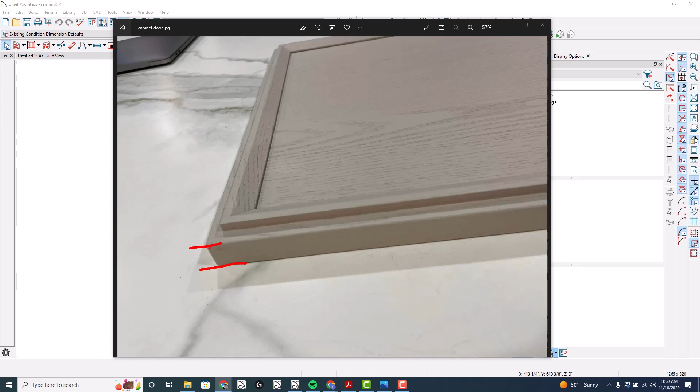We've got 3 sections here really. This frame is 3/4 of an inch. This molding is 1/4 of an inch, and this panel here, I'm going to guess, is 1/4 inch thick, and it's inset into the red frame. I'm going to guess that this molding is 3/4 of an inch, and we're going to create this door ready to be a cabinet door.

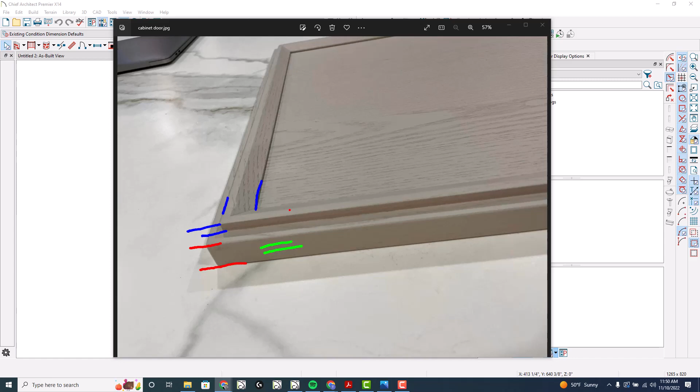So let's get started. Might take us a while, but let's do this today.

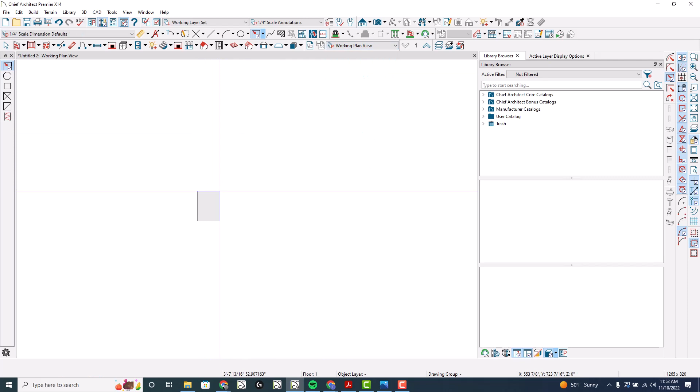To start off with, I'm going to just draw a wall—no, actually I'm going to just do this on the flat. We're going to go to this, and I'm going to draw a door, and let's make this 24 inches wide and 30 inches tall. And this will be the main panel.

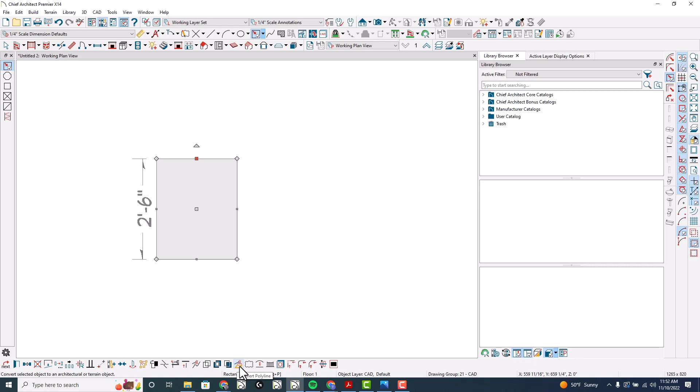Not panel, the main frame. I'm going to do a molding polyline, and we're going to select a square or rectangular polyline. I have one that I call 1x8 trim, but since I'm in version Chief Architect Premier X14,

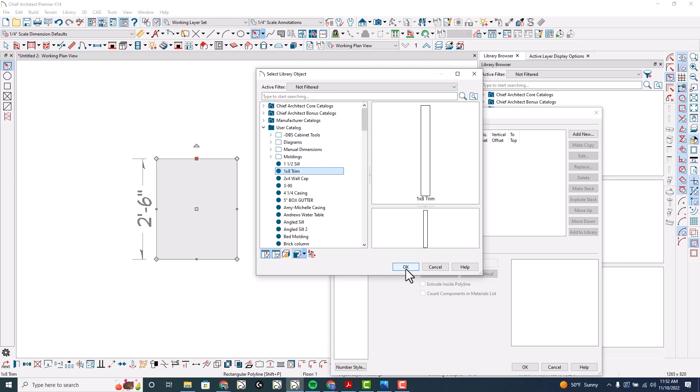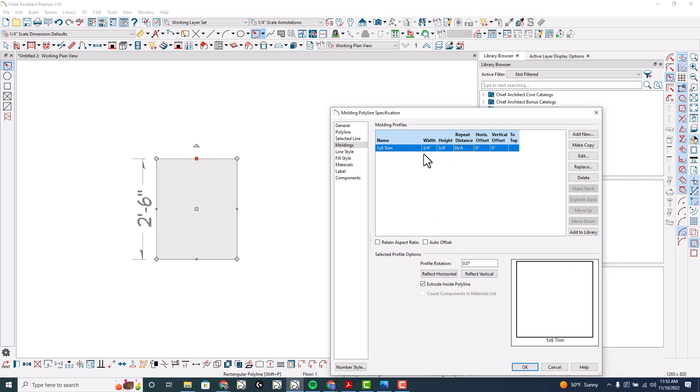and this has actually happened a couple of versions back, I believe 12 had it, I don't remember exactly—I can make this, even though it comes as a rectangle, into a square, 3/4 by 3/4, and I'm going to extrude inside that polyline. So there's my frame.

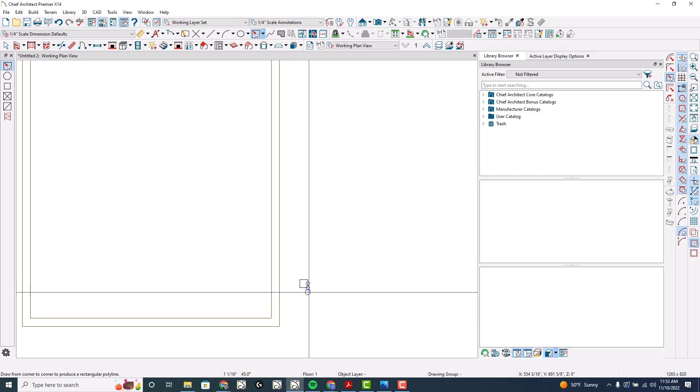I'm going to draw that profile of the molding, and I'm going to say 3/4 by 3/4, and we're going to break this square and just bevel it like so—and maybe it's not quite so much beveled.

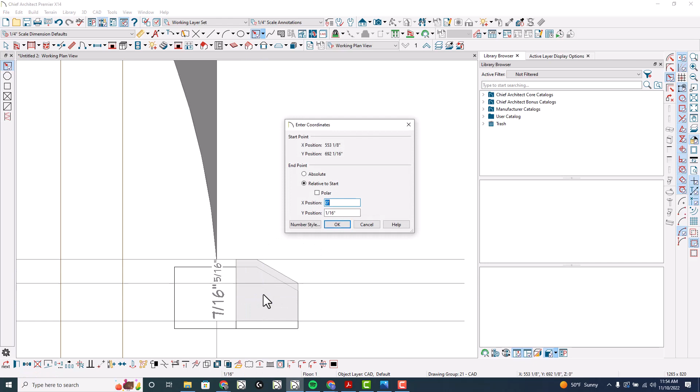So let's do a section. This is my 3/4 frame. I'm going to guess that this is 1/4 inch up, and my panel is 1/4 inch tall, so that's centered here.

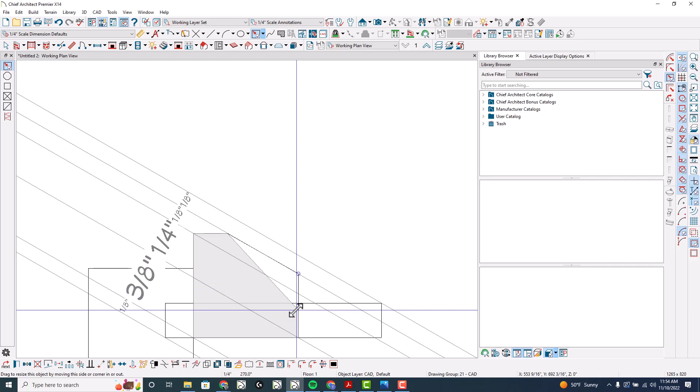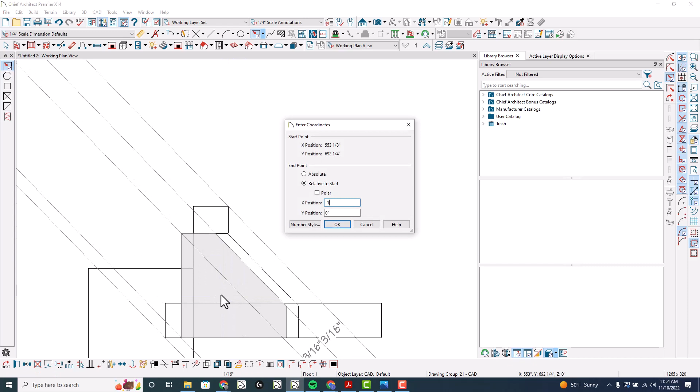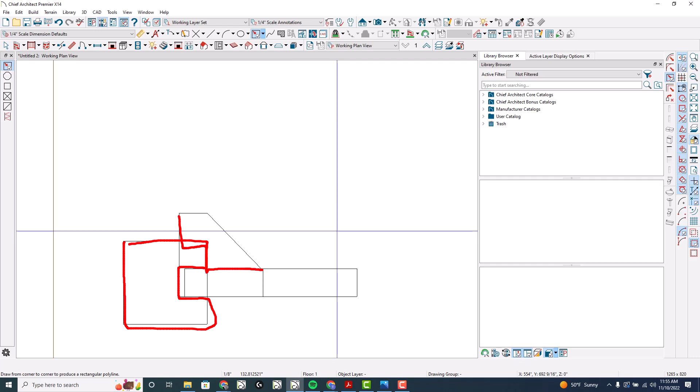This I want at 1/4, but this molding is actually going to go over -1/4, like so. So now I know this is my cut section. If I were to cut that door, I've got my frame that does this, I've got my molding that's going to actually—and then this is my panel, so this is going to come like so.

So the quick and dirty way is I could just make my molding do like that, but then if I take a section of the cabinet door, it wouldn't look quite right. So we can really make that molding wrap around the frame and the panel like that.

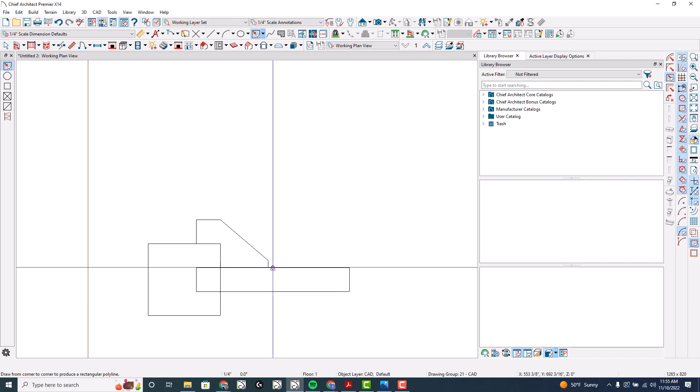Okay, so now I've got my molding in place, and I'm going to add this to my library.

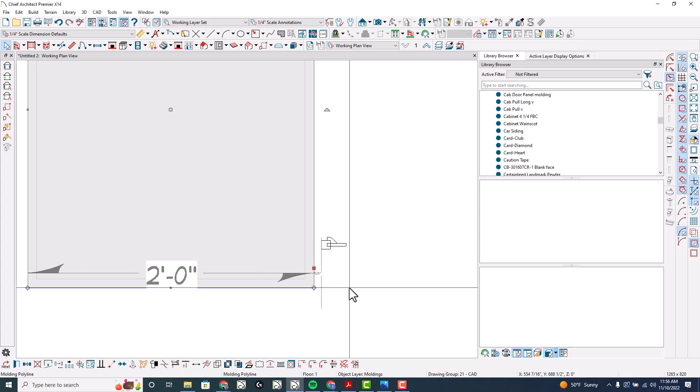Alright, so in this molding polyline, I can open this up. I could do it that I made a separate molding polyline—why don't we do that? Because then it just works. I'm going to do concentric.

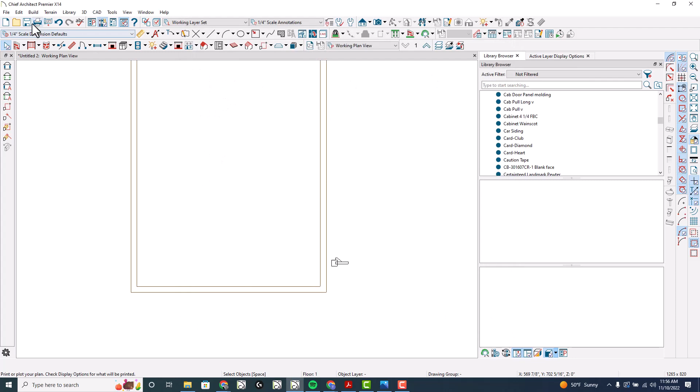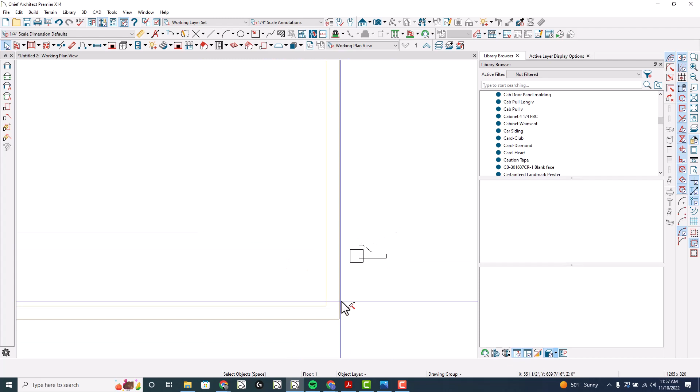So I've got my toolbar right here. You can go to Edit Preferences—I think if you're on a Mac, it's File Preferences—and go to Edit Behaviors here. We want to choose concentric, and I want to jump 1/2 inch, because remember, this is 1/2 inch inside here. So I'm going to take this and copy, and while I'm in concentric mode, I'm just going to drag that corner over, and all the way around, that's 1/2 inch.

I'm going to go back to my preferences and change the jump at 0, and go to default type.

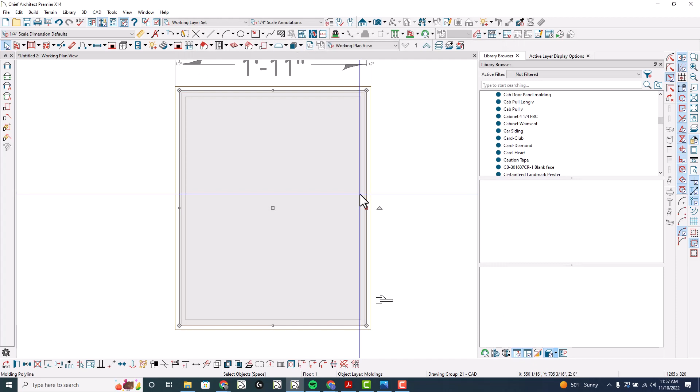Alright, so this I want to be 1/4 inch up, and I want to change that molding. We're going to replace that molding with the new molding we just created.

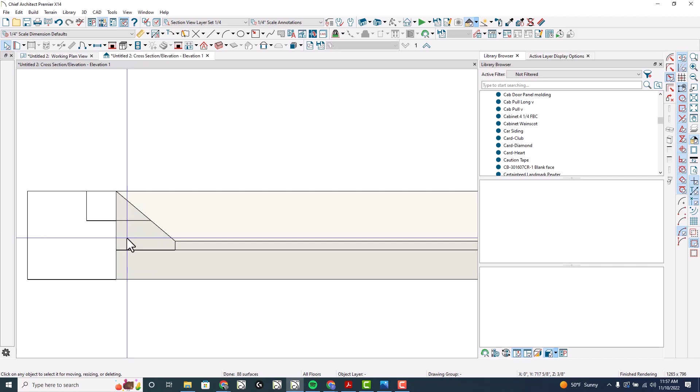Now let's take a section of this and make sure I've got this correct. I need to be more than 1/4 apparently, so let's do that. I'm going to double click. So I've got my frame here, and the molding is this one here. I'm just going to double click on that molding, and it's actually 1/2 inch up, and there we go.

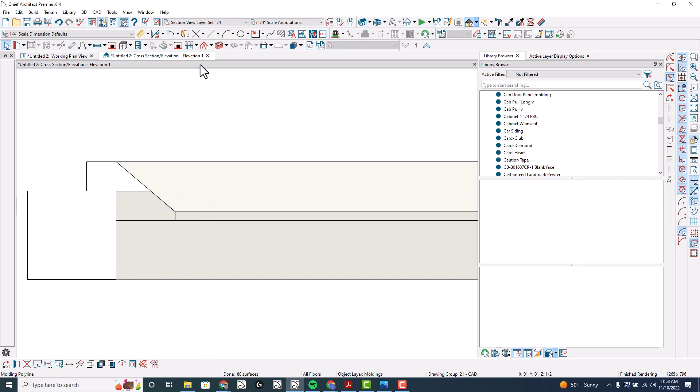When I say that, I always think of My Big Fat Greek Wedding. And so there you go. We're all Greek, and so there you go.

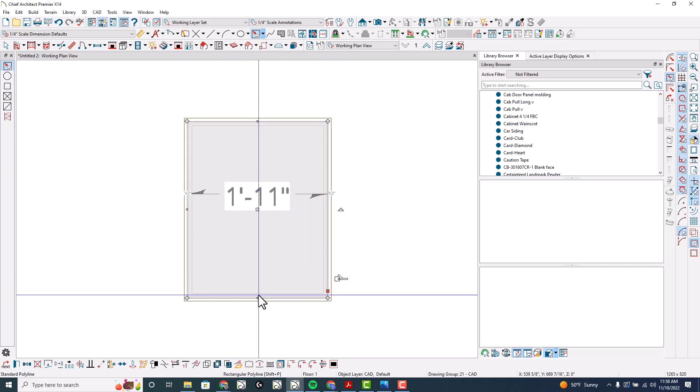Alright, I'm going to draw a panel. So I'm going to draw a polyline, the shape of that internal molding that we just created, the profile molding, and I'm going to convert this to a slab.

And that's only going to be 1/4 inch thick. Absolute elevation at the top is 1/2, I believe.

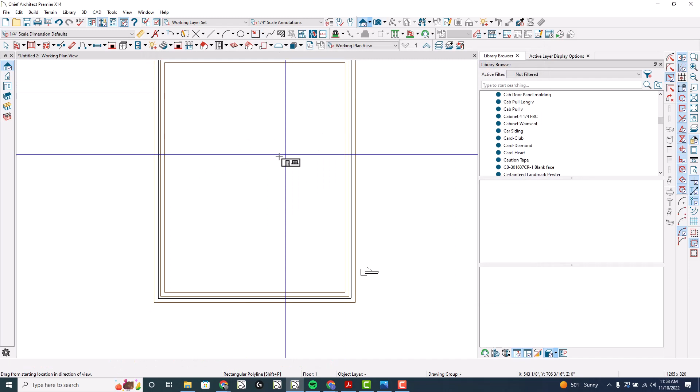Let's take our section and make sure I've got everything correct. Notice this section is exactly the same section that I drew right here.

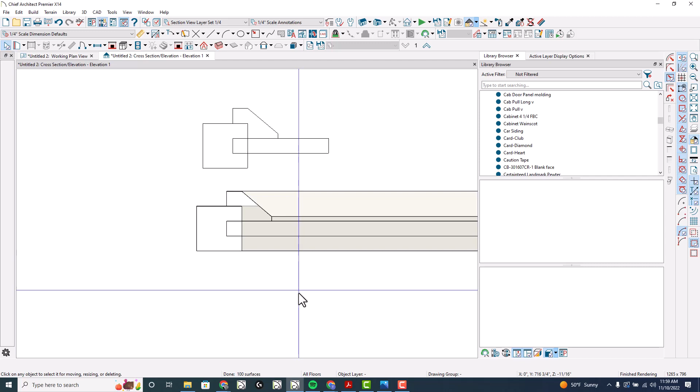We'll copy this profile, the CAD objects. There you go, that's the exact section I want. Okay? Excellent, we can close that. We don't have to save it.

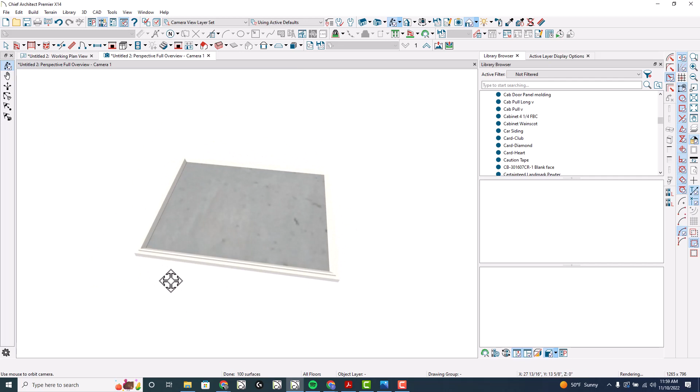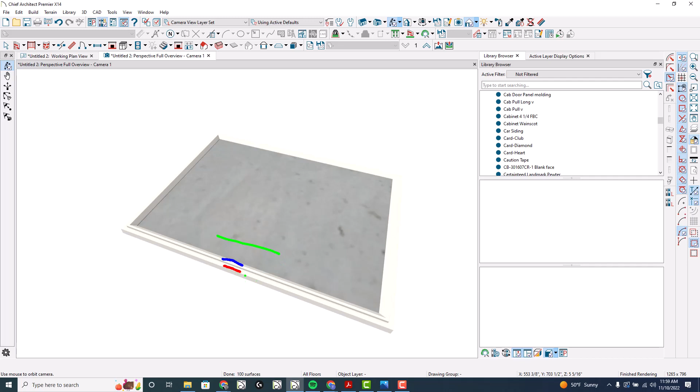Now, when working with library objects, if you want all one texture, make these objects all one texture. If you want to control the textures, then make these objects individual textures. So my frame could be one texture, my molding profile could be another texture, and my panel could be a third texture. That way I have control of the materials in the library object.

So it doesn't matter what the texture is, it can be completely random and goofy, just as long as they're different. So I'm going to do materials, colors, generic colors, and we'll say yellow, white, yellow, and concrete. Okay.

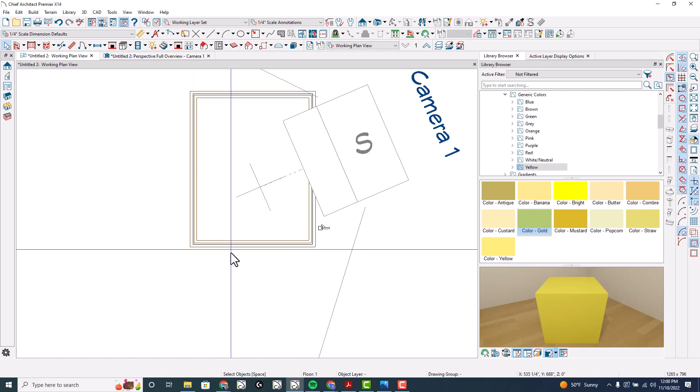I'm going to select all of these objects, and because they're different objects, I cannot just add them to the library as an object, so I have to do my picture with my camera, whether it's an overview or a camera view, doesn't matter.

I'm going to go to Tools, Symbol, Convert to Symbol. And I'm going to change this to a cabinet door drawer. And so we're going to call it cabinet door, with, let's do, panel door with molding profile. And I'm going to add to the library, and then I'm going to show the advanced options. This is important in a couple of ways.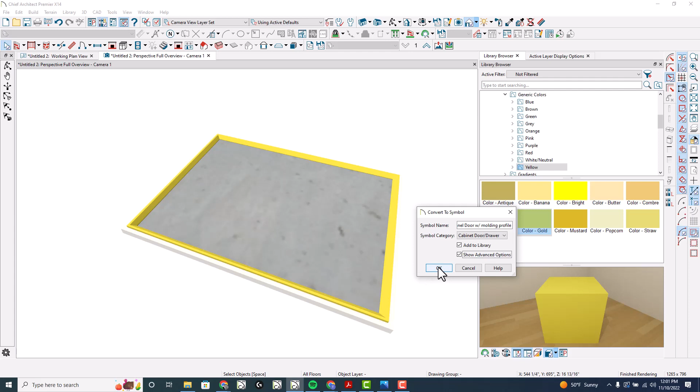Now, remember, this whole assembly is 1 inch thick. Chief Architect by default makes cabinet doors 3/4 of an inch thick. So for this to remain at 1 inch thick, we have to take care of that in a couple ways.

Let's first of all rotate this so that we have, not in the Z, alright, so my Y position needs to be -30, nope, +30. We might have to play with the orientation. That might be fine. Alrighty.

2D block. That's fine.

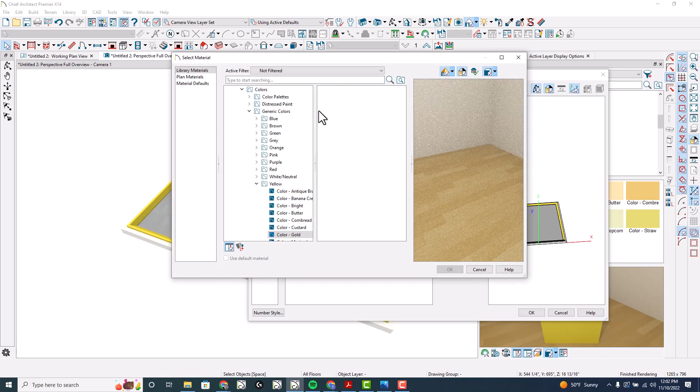Materials. Here's where it's important. So color bone is the frame. And I'm going to click once and click again. It's not a double click, because then you select the material. Just going to click, select it, and then click again, and I can change that. Frame, I'm going to change that to name it and what it is. Molding profile.

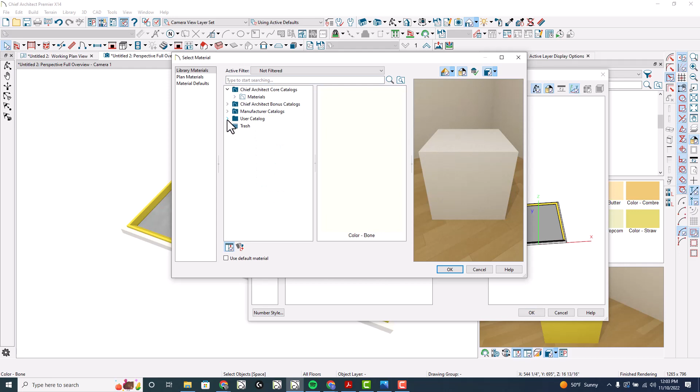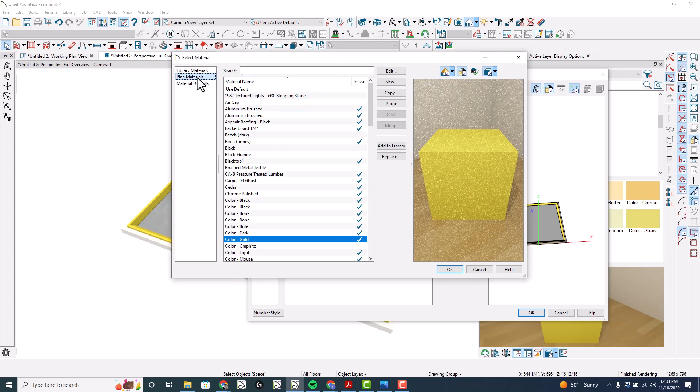Click, and click again. Panel. Now I can select the material, and this is the default material that I want to add to it. I want it to drop in directly from the library. So let's find a nice wood material, and we'll say maple, and we'll call it maple blonde. We'll do maple blonde. Okay, I can just go to Plan Materials tab, and hit M for maple, and there's maple blonde.

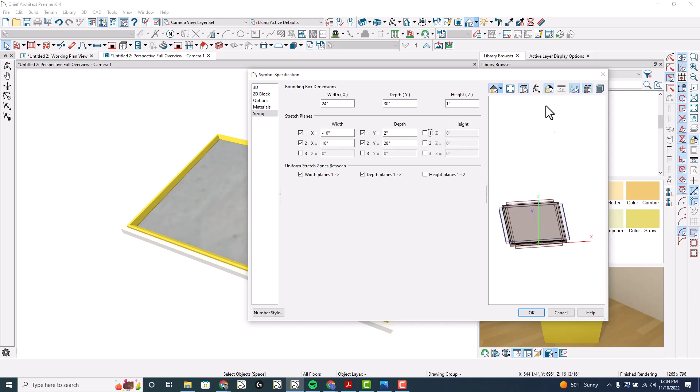Alright, sizing. This is important as well. I'm going to stretch from, this is 24 wide, so -10 to 10. And then, not height, depth, let's say 2 to 28. So there's our stretch planes. That means the profile is not going to warp and stretch its proportion as you resize the door.

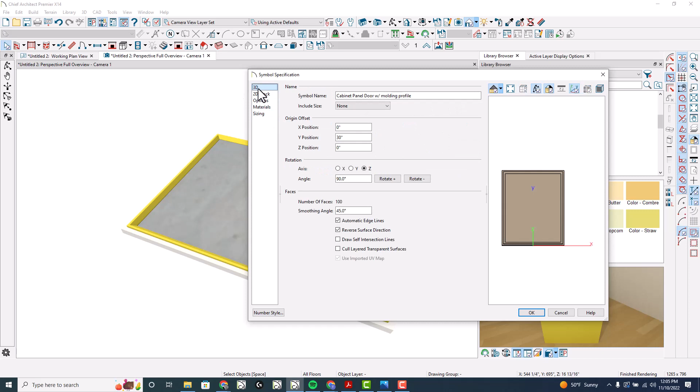It's just going to stretch within these planes, and everything outside the plane will remain correct. Now, lastly, I think this is it right here, 3/4. We need to change my Z to 3/4. You'll notice this kind of plane right here that we're defining the box. We're telling the library item that it's really 3/4 of an inch thick, even though it's modeled at 1 inch thick. That way, when Chief puts the 3/4 inch construction of a door into this, it won't shrink that 1 inch all into a 3/4 inch thick item.

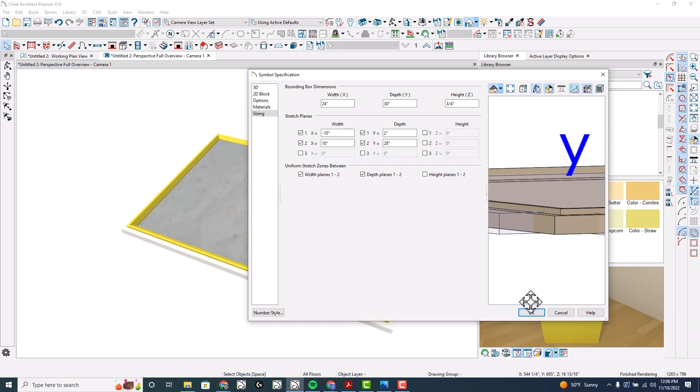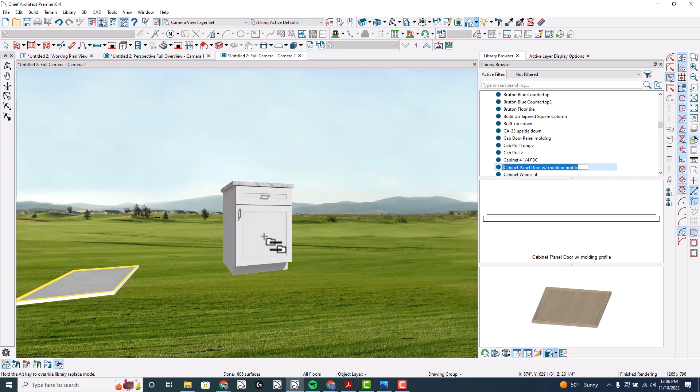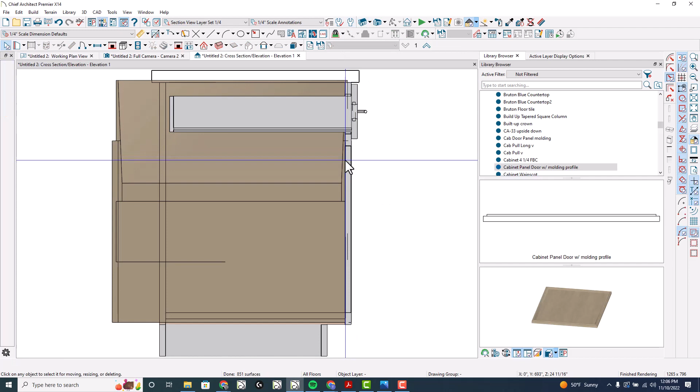Okay, so there's our door. Let's see how this works on our, let's see if it works. We might have to orient differently here. Let's see. I'm going to click on that. Whoa, what in the world? Let's take a section of this and see what happened. Yeah, we got to reorient that. Okay.

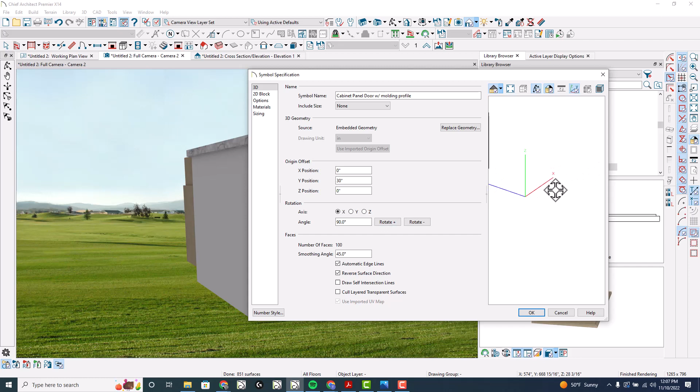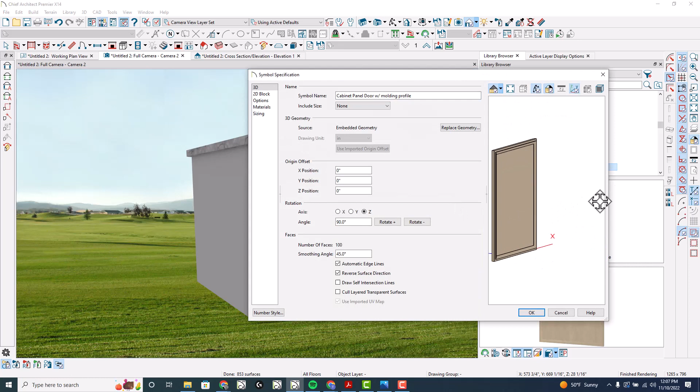So I'm going to right click and open this symbol, and about the X, let's go 90. There we go. And this is 0. Now let's paste this on here again. There you go. Yep. It's got to be oriented face up. So the face of it, yeah.

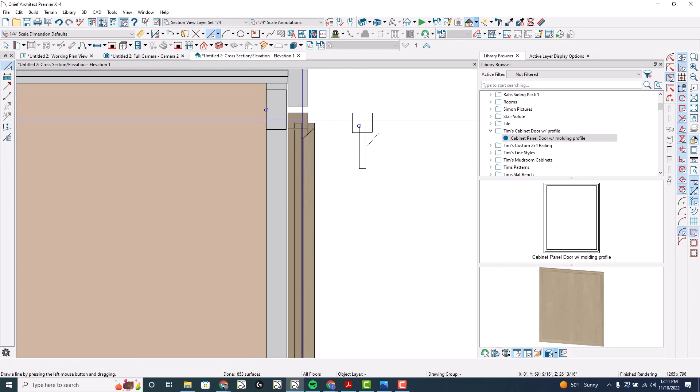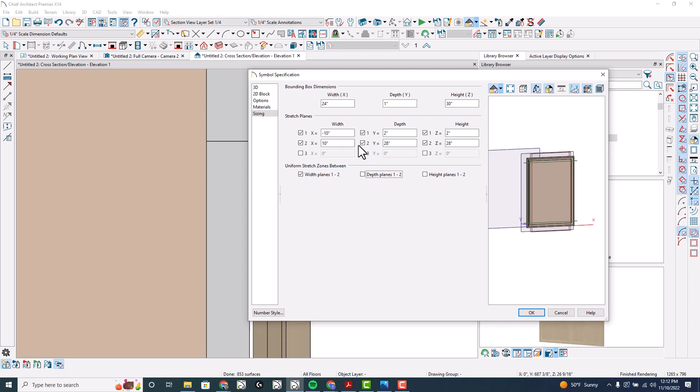Anyway, before we finish this up, I did want to double check and make sure our profile is correct from what we drew. So I took a section of this cabinet, and I noticed this frame isn't quite that 3/4 of an inch thick when I drag this profile over the section. So something's not quite right. I'm going to go back to the cabinet panel door and open the symbol. I noticed that I had my depth planes here, like so. Because back when I rotated this is what happened there. So I want to turn off my stretch planes here and actually have my Z stretch planes there. Now when I replace this door, my stretch planes are correct and my profile is accurate.

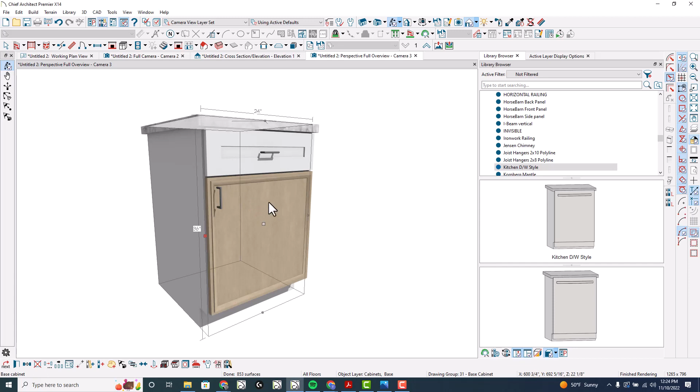So I should point out a couple of things before we go, that because of the stretch planes, when I resize this cabinet and the doors resize, the profile stays accurate. I can even delete this drawer and the height profile stays accurate.

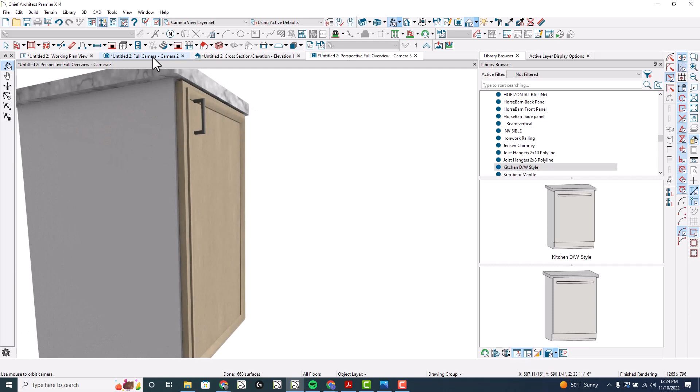Remember, we also set up 3 unique, now that's interesting, I haven't noticed that. The door handle isn't quite right. It looks like it's floating. Let's do this. Yeah, it's floating out at the full 1-inch thickness of the door itself. I'd have to think on how that's done.

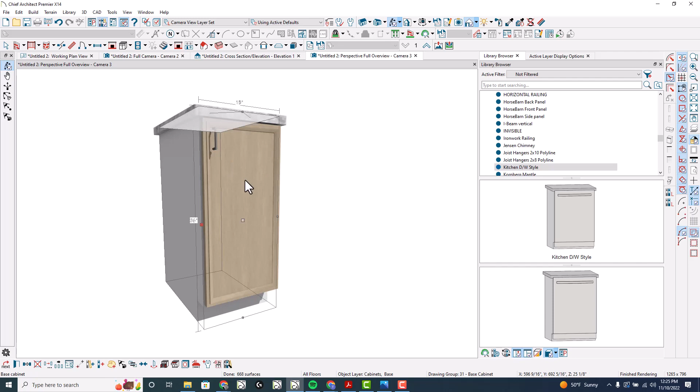Anyway, yeah, that's a... Can we manage that with hardware? Door handle? No, we can't adjust that. Well, that's a bummer.

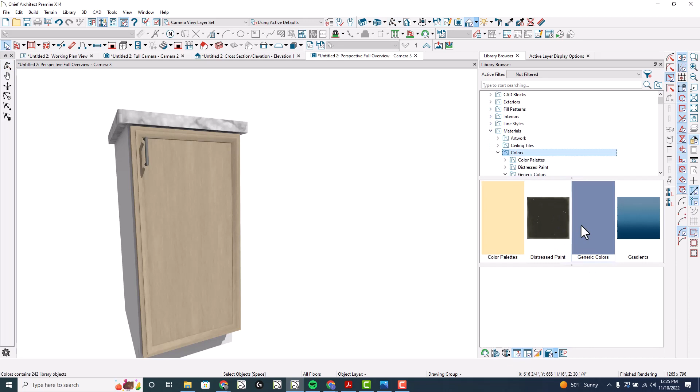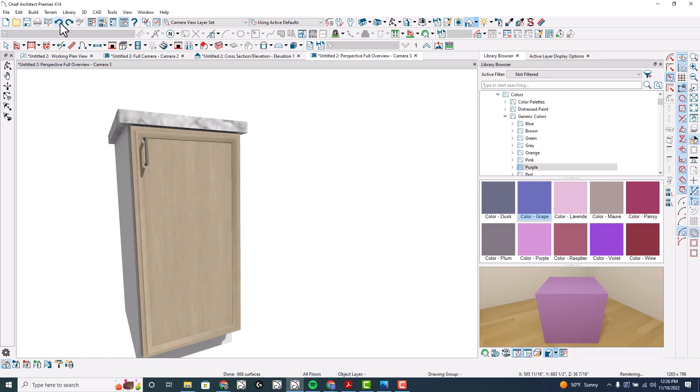I did want to show you the materials, so I could do a black molding. I could do a brown trim and a purple panel. We could also undo, and let's go to a gray, and let's put the roller on and turn on the whole object. So everything that is this maple blonde in this object is going to get mixed with this color neutral gray. So there's a quick way to do that whole door like so.